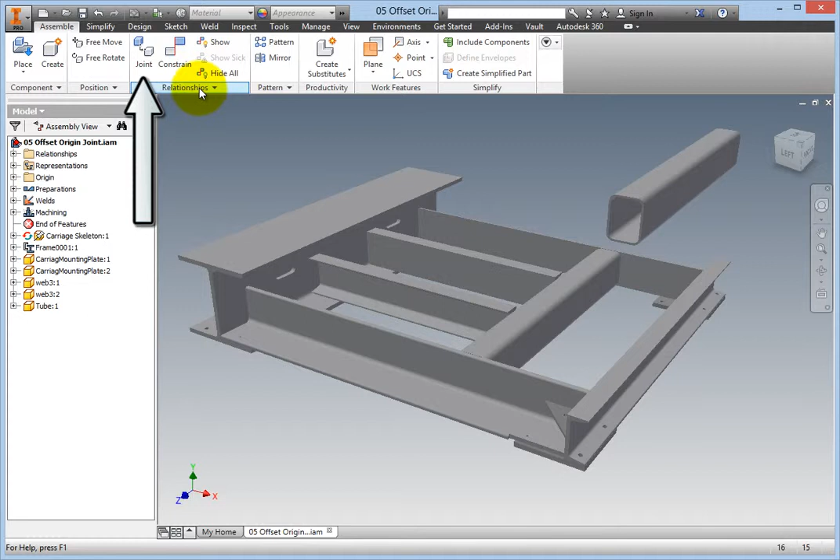On the ribbon, Assemble tab, Relationships panel, select the Joint command. The joint type is automatic by default and should remain that way. The first origin indicator is active, so you need to select the origin on the movable part, the tube.

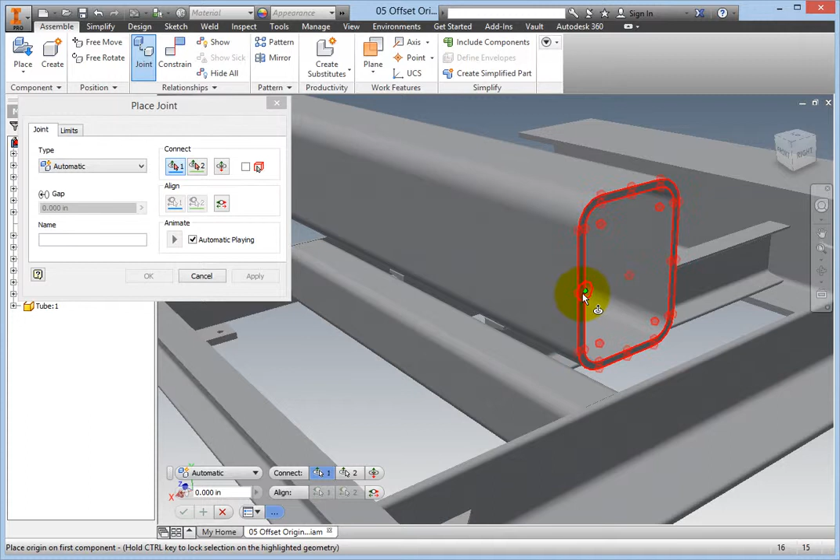Select the outer center point of the right side, and then right-click and select Offset Origin. The second origin indicator is now active, so select the center of the end of the outer rail.

Offset manipulator arrows are now present at the location of the second origin glyph, along with dynamic input boxes for manual specification of values. Drag the x-axis manipulator arrow in the negative direction a total of 5 inches.

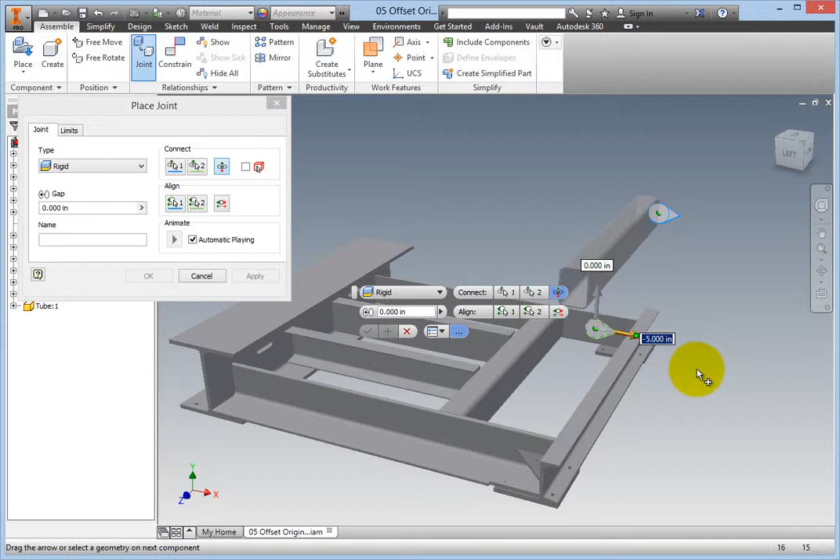If it is hard to get the exact distance using the manipulator arrow, you can just type -5 in the input box. Now, right-click and select Continue from the marking menu.

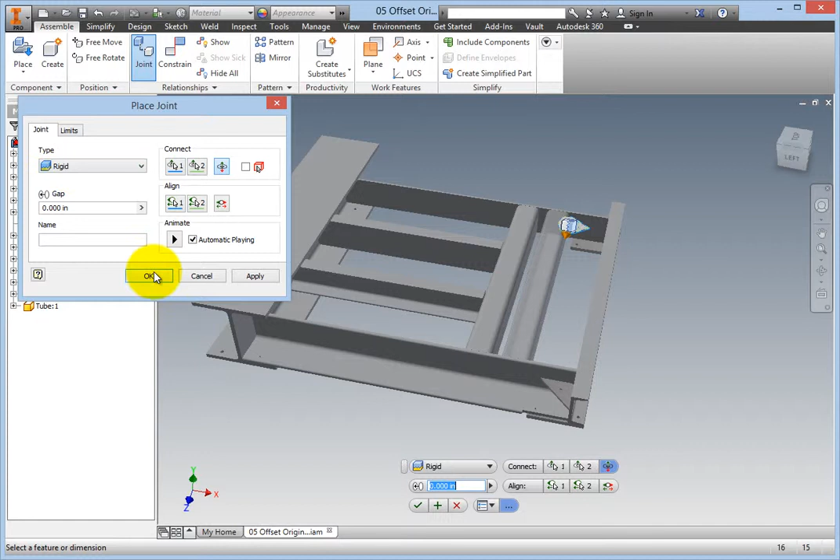The tube part should glide into place, and the joint selection drop-down should indicate that a rigid joint will be created. Click OK, and the joint is created. Expand the Relationships folder to verify that a rigid relationship was created.

Then right-click the Rigid 1 relationship and select Other Half from the context menu. Both halves of the relationship are now exposed, one on the frame assembly and the other on the tube part.

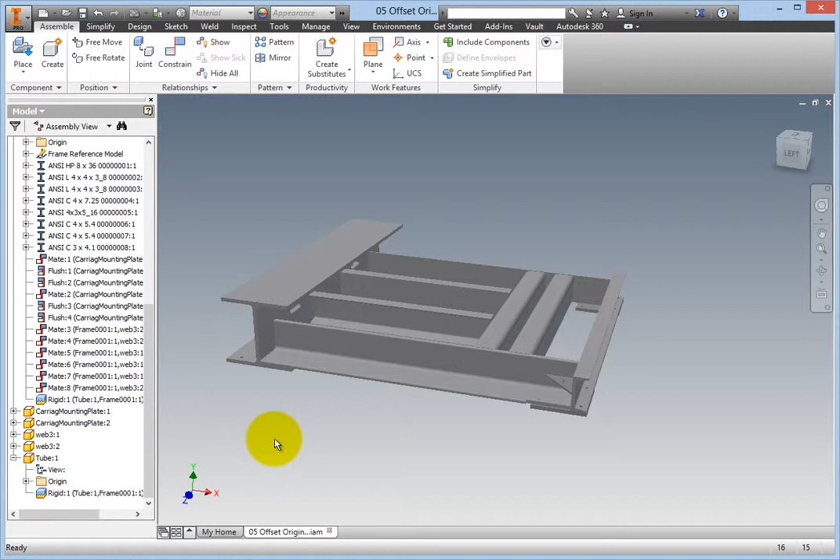Now check your work. Switch to the Inspect tab on the ribbon. On the Measure panel, select the Distance command. You need 1.5 inches between the tubes.

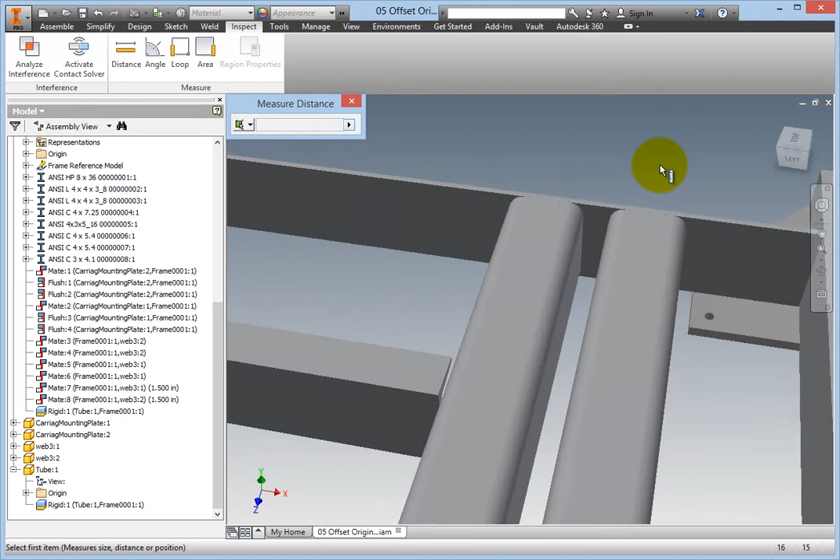Measure between the tubes, and you come up with 1 inch, which is a ½ inch less than the gap you needed. To fix this, you need to edit the relationship. Right-click either of the Rigid 1 icons in the browser, and select Edit.

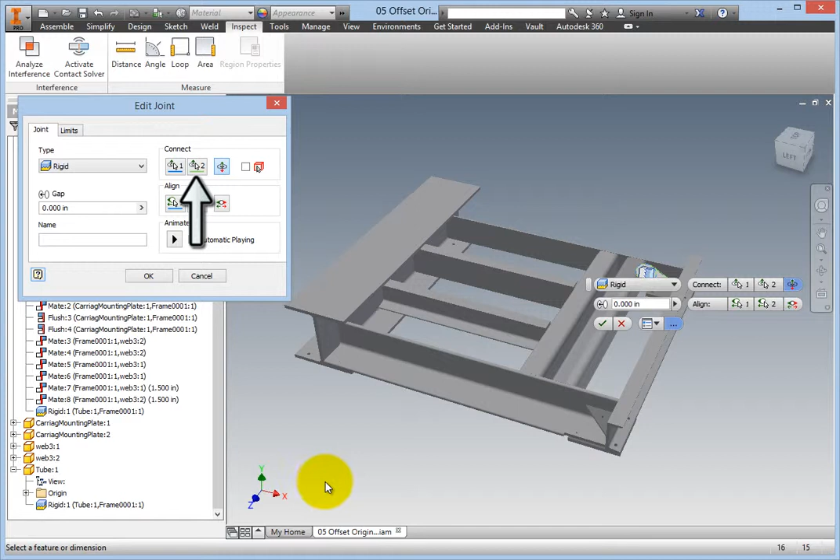Select the second origin indicator to reactivate the offset manipulators and input boxes. You may have to click the x-axis manipulator arrow to activate the input box.

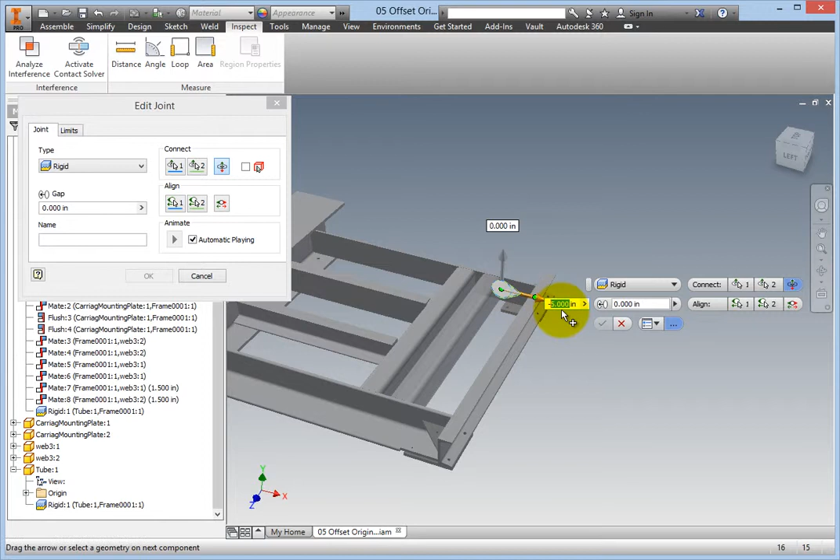The -5 inches was too far by 1/2 inch, so change the value to -4.5 inches, then right-click and select Continue from the marking menu. You will see the pipe move the ½ inch. Click OK.

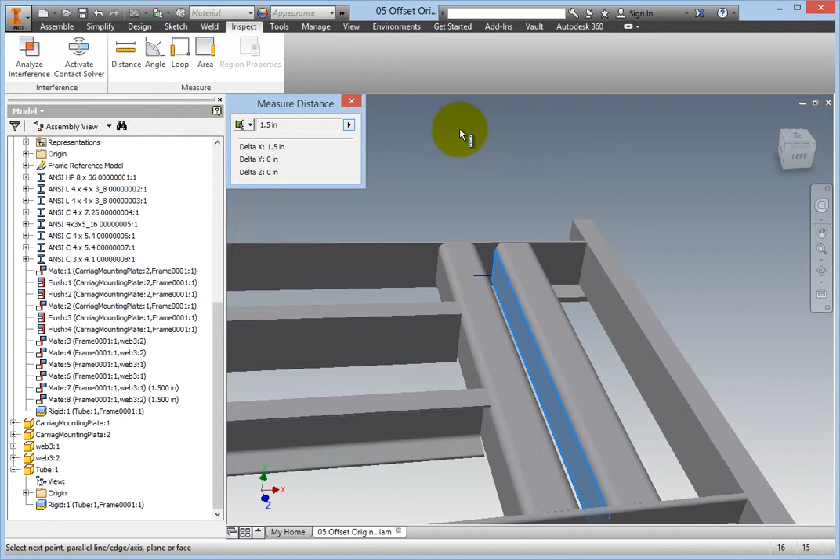Now, use the Measure tool again to recheck the distance, which should now be correct at 1.5 inches. The same workflow can be used to offset the origin of the relationship using both manipulators.

When used in conjunction with the normal offset field on the Joint Commands mini toolbar, all 3 axes are represented, making it possible to position parts anywhere in 3D space with a single command.